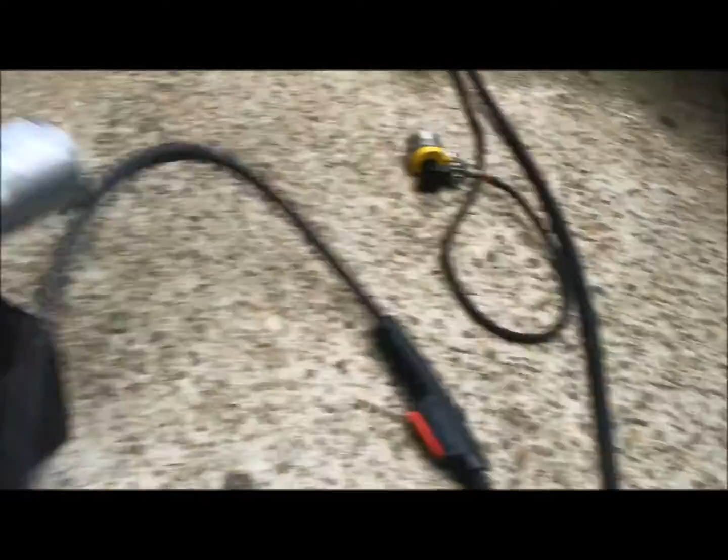Now, I live in California, and the new law says you have to have a cat that has a D on it. And then the rest of the code has to match your vehicle or the vehicle type.

This is a universal weld-in type, so I'm going to be cutting out the old one and welding in this guy. They're multi-directional, doesn't matter which way it goes. Let's see if I can find the arrow. There's actually an arrow on here that says both ways. Some of them may only point one way, but this one, I can put in both ways.

So the cat is actually located on the back, passenger side, underneath this skid plate, right up in there. A little hard to see. So I'll be taking the skid plate down and replacing it from there.

So to get this plate off, you're gonna need a 3/4 inch socket. And there's 3 bolts on both sides. You have one up here, one in the middle, and one in the back on both sides. So there's 6 bolts total.

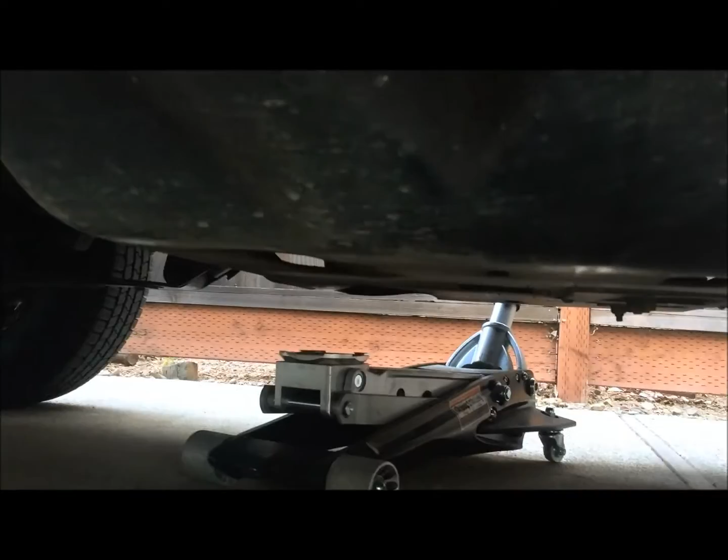So we're gonna go ahead and crack it loose, and then I'm gonna put that jack right underneath the middle of it and see if I can lower this side down and work on what I need to work on. We're gonna start with loosening up the bolts on the other side, the driver's side, and then take the bolts off on the passenger side completely so I can access the catalytic converter.

Okay, so I'm going to go ahead and cut it right past that weld there, and then right past this weld right here. It's hard to see. Sorry guys. There you go. It's right back here.

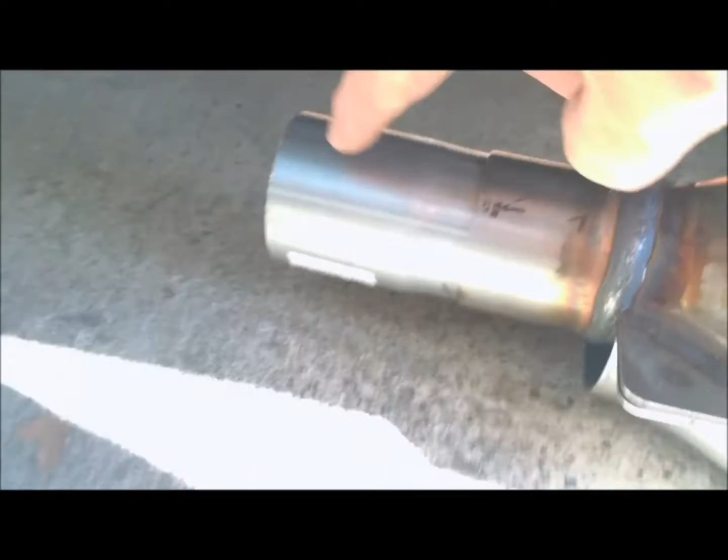So it's roughly 19 inches cut that I'm doing. What I have here are some extensions to extend this, and also here to extend it. So it's a little over 19, I think about an inch on both sides, so we'll give it 21 inches total. But you don't want to cut the full 21 because then you won't have anything to overlap the old pipe.

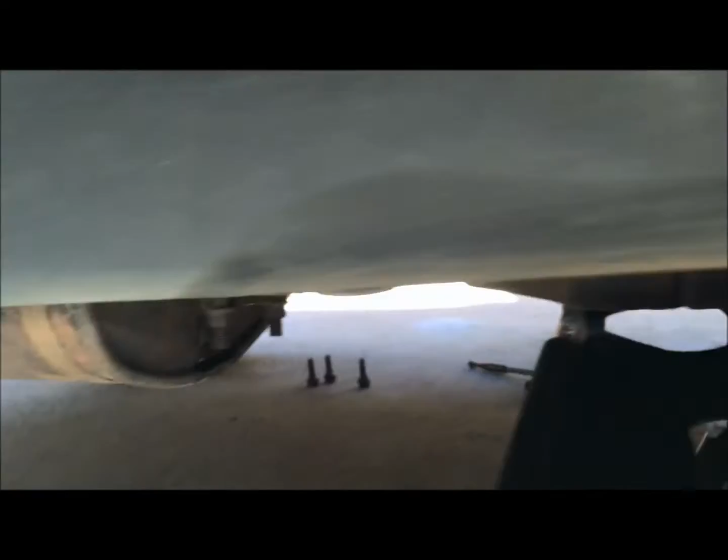Okay, so we're going to cut the back one first, being that that's all suspended by brackets, and then we'll cut the front one. That's suspended by the engine, so it'll be less vibration if you cut the back one first. If you do the front one to the back one, you're gonna have a really hard time cutting that back weld because everything's just gonna be shaking.

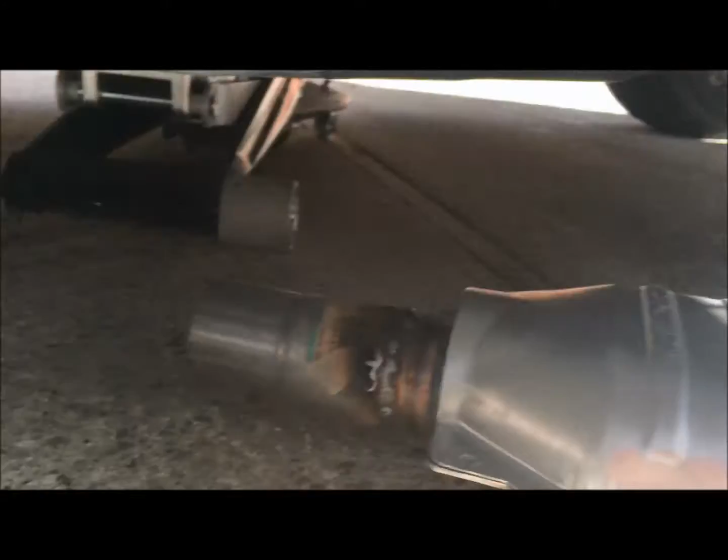Okay, so now that I got the 2 ends welded on, I'm gonna make sure that the thing that says top is pointed up towards the car. And then I'm going to slide it over the pipe. But before I do that, I want to make a measurement of the actual end to end and mark on both ends of the pipe so I know I have good overlap on both ends.

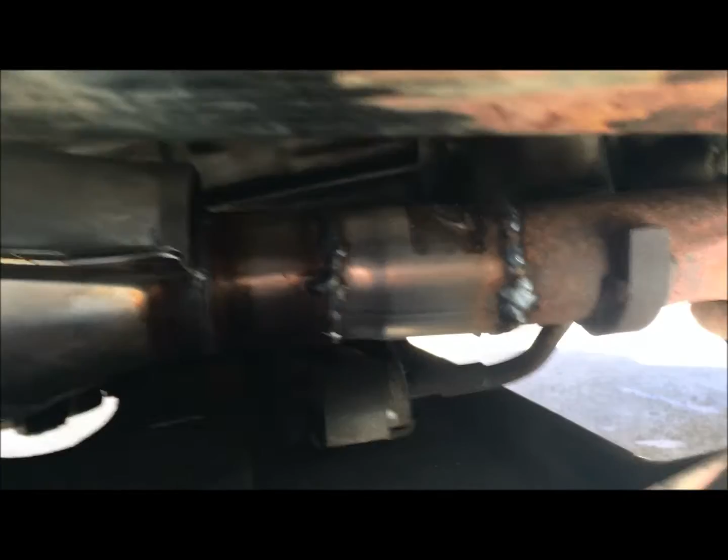Alright guys, got it welded up. Gonna put the pan bolts back in and take her off the jack stands, and I'll start her up and see how it sounds. Alright, thanks guys for watching.

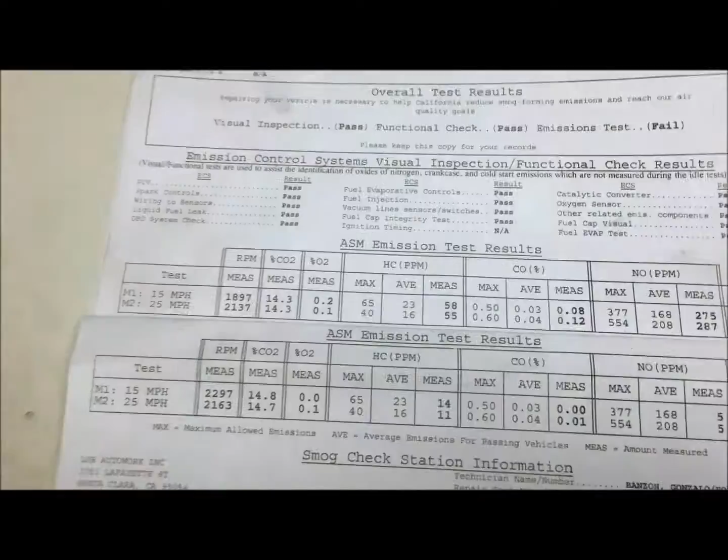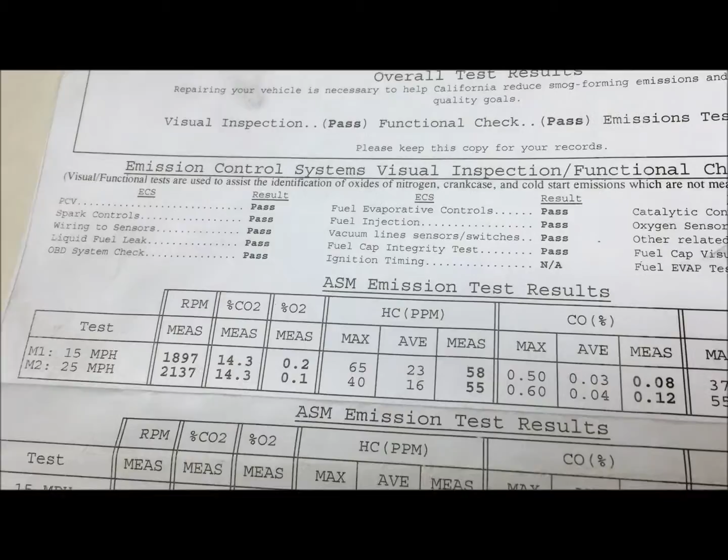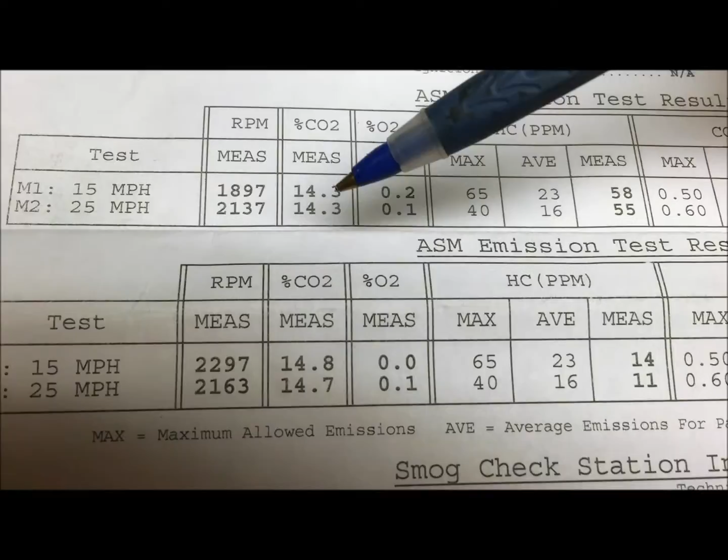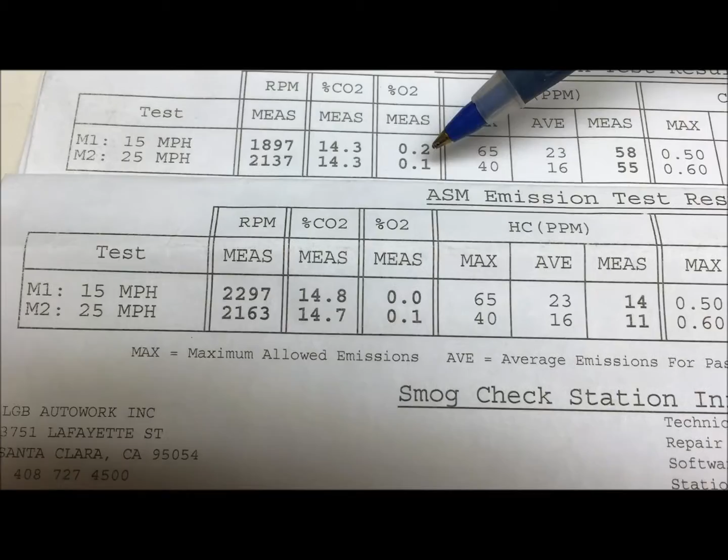Alright guys, so after my smog test on Tuesday, I passed the 15 mile an hour, but did not pass the 25 mile an hour. As you can see here, the top sheet is the pass failed, the bottom sheet is the pass. So you can see here, these are my numbers from before, 0.0 or 0.2 on the 15 and 0.1 on the 25. I went down to 0.0 for passing.

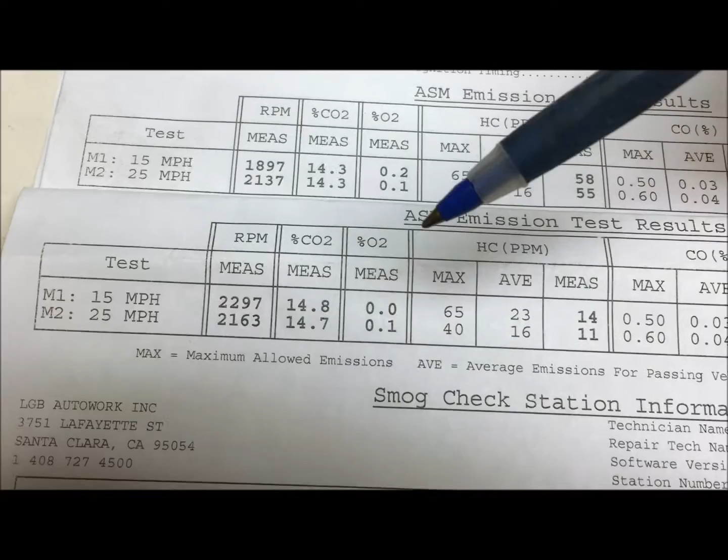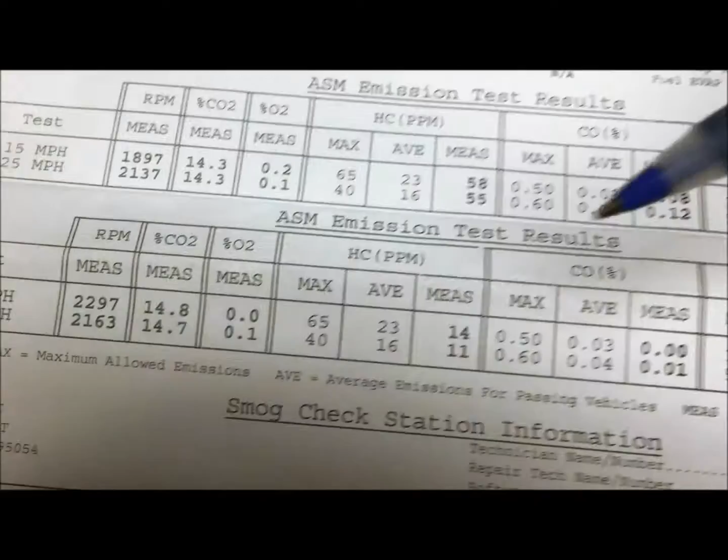You look at my HC numbers, I was 58 and 55. I went down to 14 and 11. And then you look at my CO numbers, I was 0.08 and 0.12. I went down to 0 and 0.01.

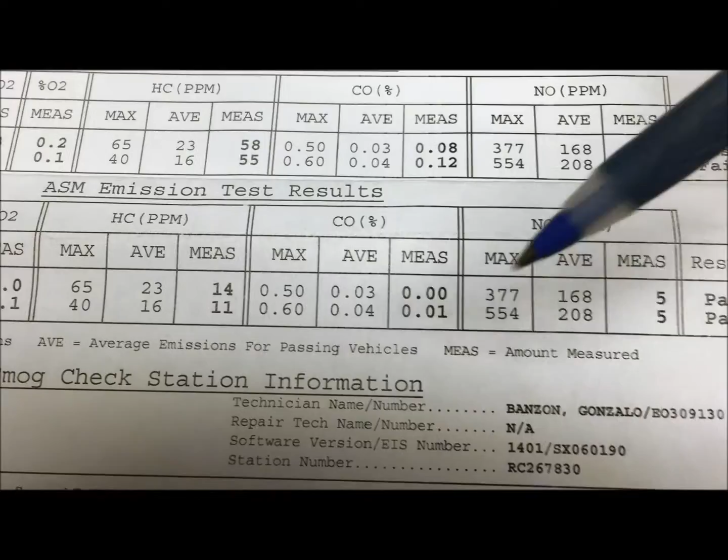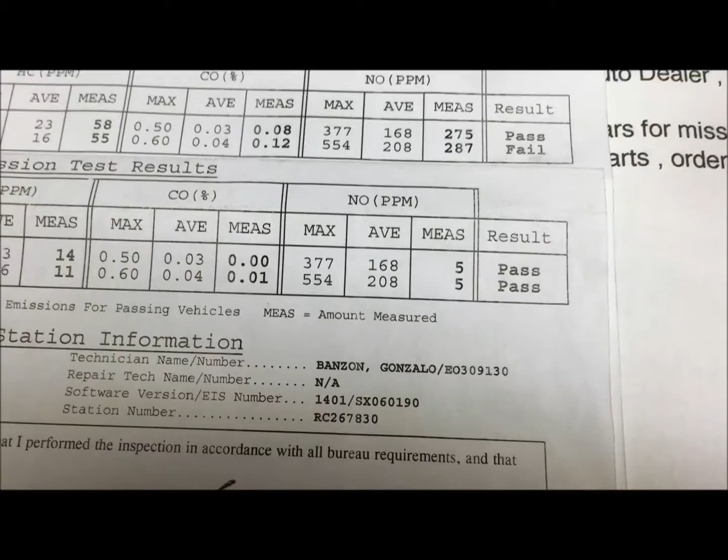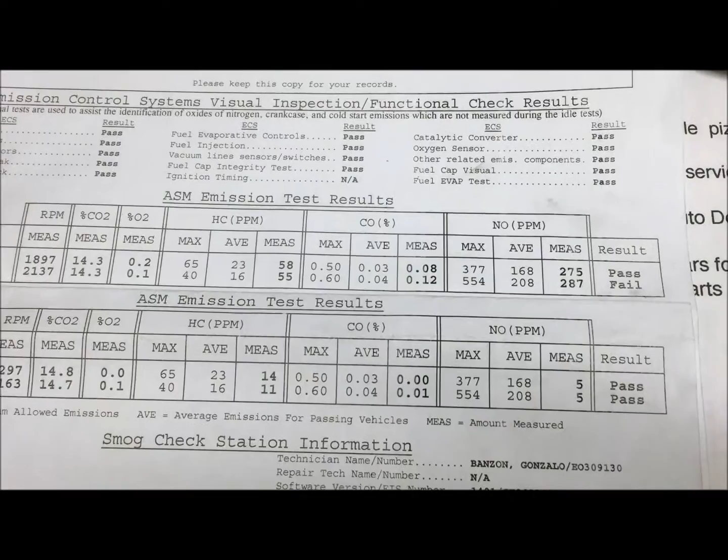And then this is the biggest one, 275 and 287 down to 5 and 5. So the only thing I did to help pass is I replaced the catalytic converter, like you guys saw in the video, and then I also added a quart of denatured alcohol into the gas.

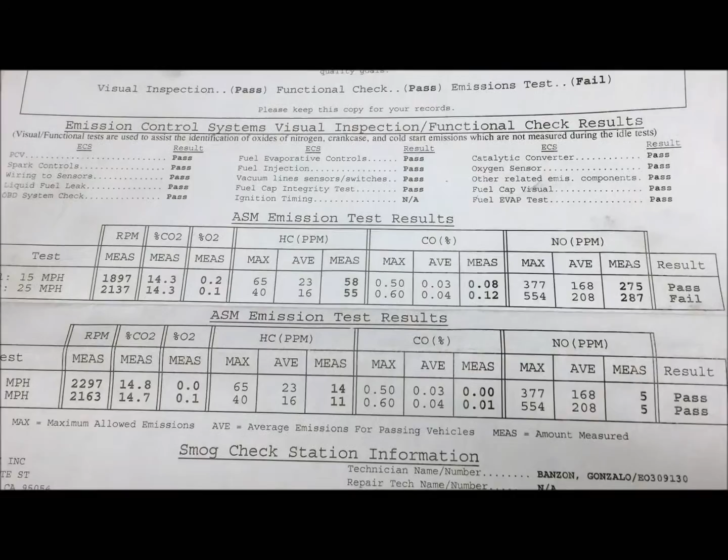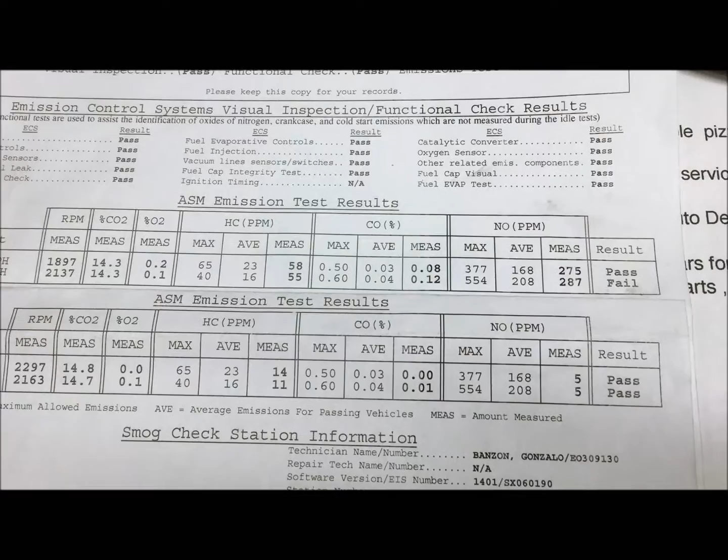So that pretty much was all that I did, and those are the numbers I got. So I recommend, if you guys are borderline passing, put some denatured alcohol in there, and or replace the cat as well.